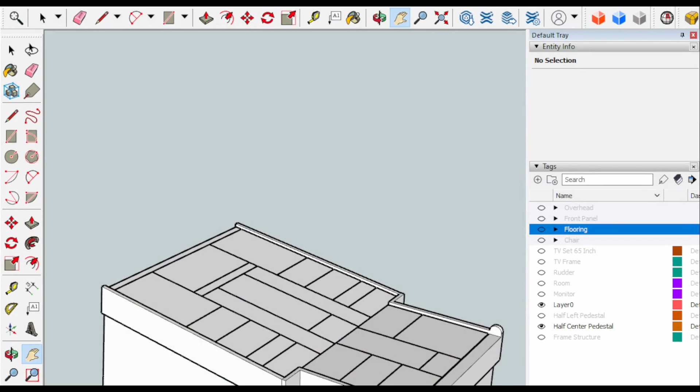Okay, so here we are, the center pedestal design. I'm going to show you this construction made of MDF panels - I think it's 9mm, mostly 9mm, and 12 millimeters thickness. I'm using metric numbers anyway, so it's 9mm or 12 millimeters thickness combinations on the MDF panels. The structural part, I guess, uses 12 millimeters, and the panels mostly use 9 millimeters.

The whole panel is glued together using super glue, so use a mask, a really tight filtering mask, because the fumes of the super glue are toxic when it gets in touch with particles of the MDF. But once it's glued, it's really super strong and glued together well - so even without using a nail or screw in constructing these cabinets, surprisingly it's very strong.

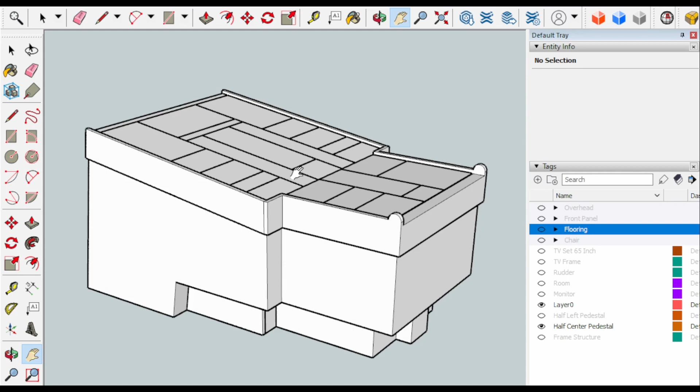Even with the loading of the throttle mechanism, it can hold quite well. This is close to the real one, except this is a bit too wide in terms of dimensions, but the overall dimension is probably okay. It's been adjusted from the reference drawing and photos, so it's mostly okay.

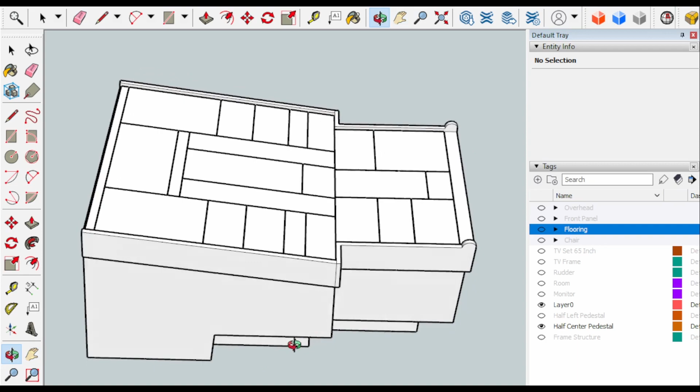These are the panels. The dimensions of the panels will be used in CorelDraw to come up with the right panels, which will be attached to this construction. When constructing with MDF, I try to be as accurate as possible within millimeters, because once the panel is set in, there will be gaps if not properly done - the gaps could be either too big or too tight.

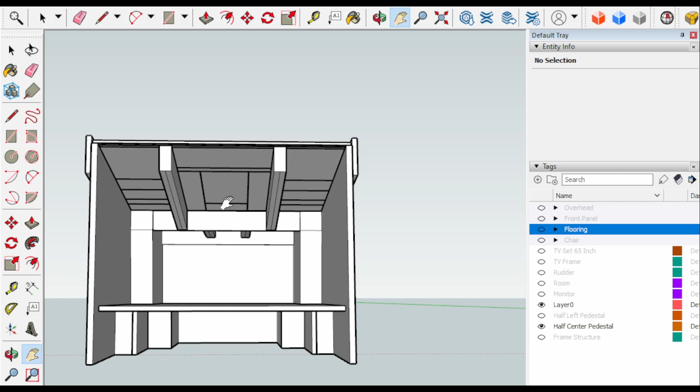So this is the structure. There's a brace MDF panel here for the strut to attach to. This is a double 9mm attached together, so each side has 9mm, or almost 1 centimeter or 10mm, of space to screw the panels from on top. So this is the whole construction.

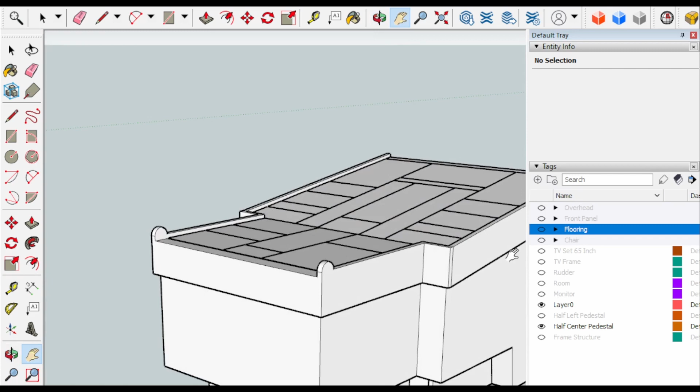Actually, this isn't shown here, but on the bottom area there's a base, and it's actually screwed into the lower deck of the cockpit. The upper cover here, made from MDF, is actually covered by faux leather.

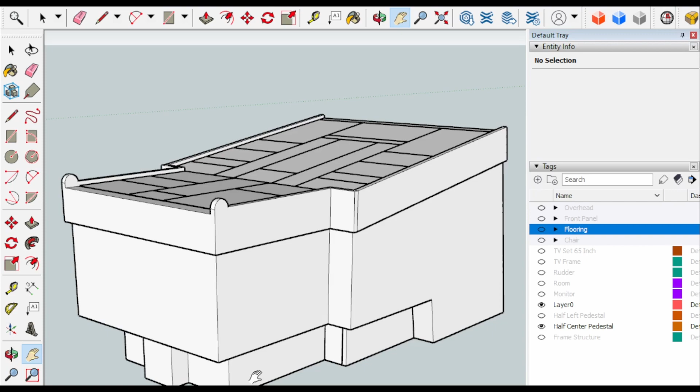The faux leather color is kind of blue, dark blue-gray, so it was very difficult to find. Finally I found one that quite matched the original color of the faux leather, then covered this MDF panel with it, and screwed it from inside using a wood screw so the screw wouldn't show up on the outside. So from the inside panels we screw these edges, this cabin - I mean the pedestal edges here.

Okay, so that is the main construction. Once I'm done with this dimension, I transfer the dimension into CorelDraw.

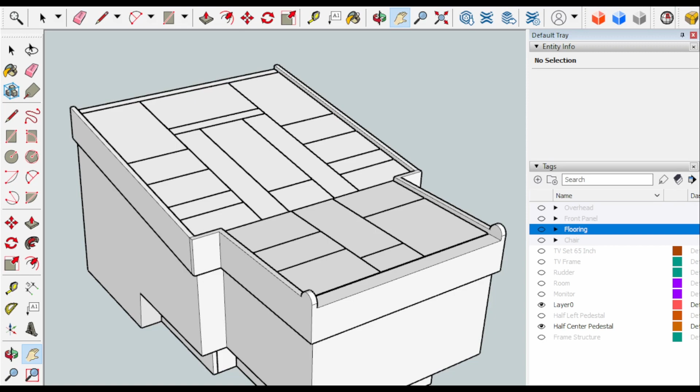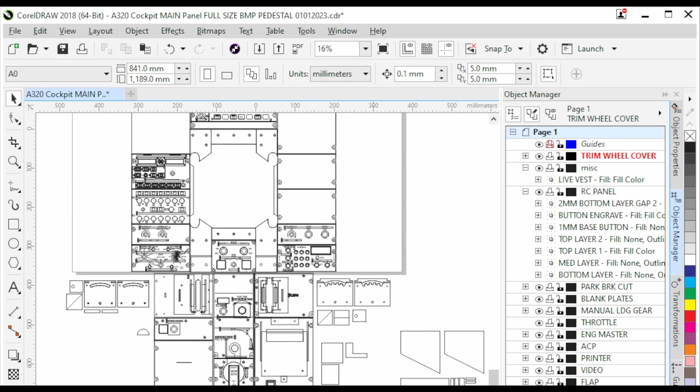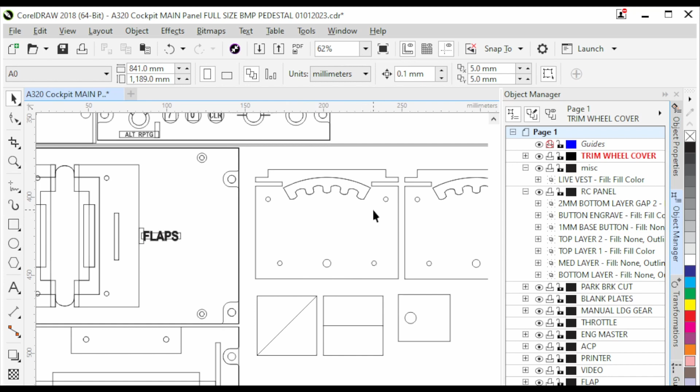This one is for flaps mechanism. So this is the side panels here, where you put a 3D printed shaft with a center shaft connected into a potentiometer here. So it's spring loaded, so you have to pull up and then move to this gated channel here. This one is sandwiched over here and over here to create a gated kind of mechanics for the flaps.

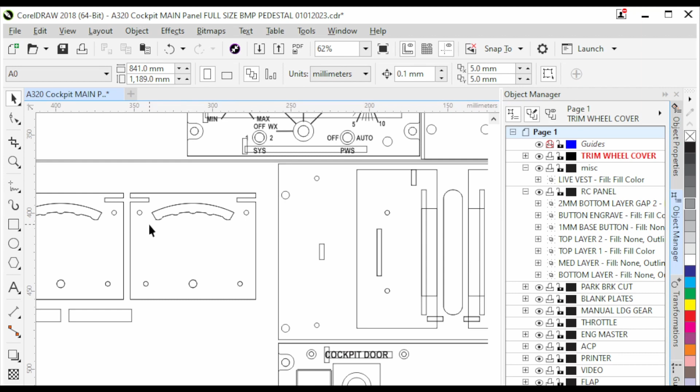On the other side there's a kind of spoiler mechanism. This one is not gated but slightly raised, so you can feel it's not smooth as probably the original. I've been told that it was supposed to be smooth, but I created a kind of gated mechanism so you can feel its tab or its position, this spoiler. But I've heard that actually it's not supposed to be like this.

Also the switch, later on using a push-pull switch - I'm gonna show the mechanics later. It's a car light, an old car light push-pull switch, which I constructed using 3D printing, so I can push and pull the lever when I want to arm or disarm the spoiler.

I didn't simulate the push down to enable the spoiler manual setting. It has to be - the lever has to be pushed down, and then you can move backward on the handle itself. I don't simulate that because initially I didn't know about it, but once I realized that it's supposed to be there, my design was almost complete, so I didn't want to go back and redesign the whole thing again.

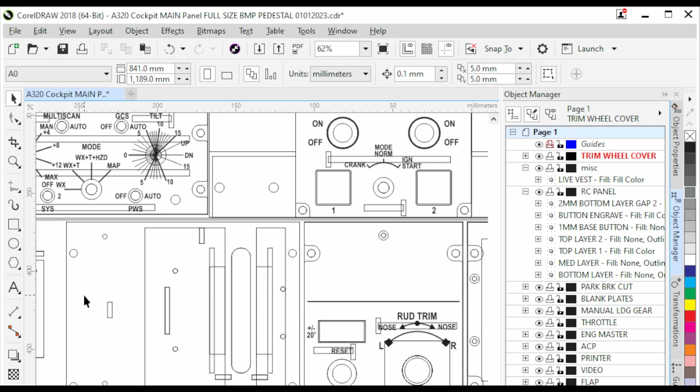Okay, so yeah, basically that is the Coreldraw. So this is a 3-layer or 4-layer panel design. I can start from this simple switching panel for the source of the air data from captain or first officer or normal, mostly in the center position. I connect this into MobiFlight, but since fly-by-wire does not simulate this area, it's not yet activated.

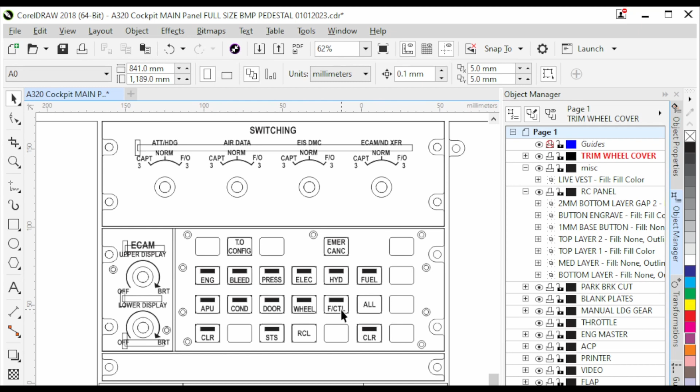This one's very important - I use a lot of Ecam switches where you can change Ecam display. Here it's actually using a hybrid solution. The top panel is actually acrylic. The bottom parts are actually 3D printed to create a kind of housing for this button. So it's a combined housing, it's not separate switches. I'll show you later on in SketchUp.

This one is opening for the throttle tech. I measured the throttle tech once it arrived at my home, and I measured the whole thing, then tried to design and incorporate the opening for the throttle tech throttle. I'm gonna talk about the throttle tech throttle later on.

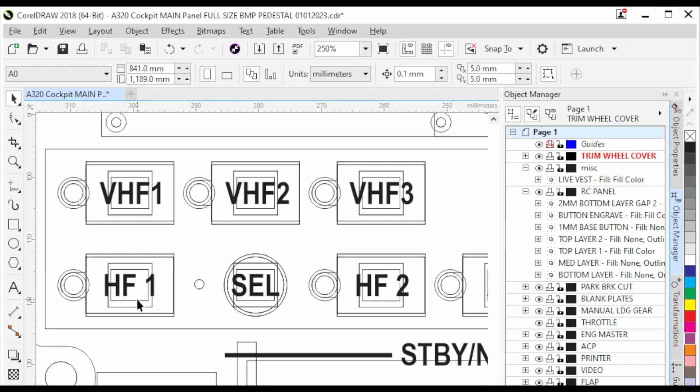This one is for radio panels, mostly acrylics, 4-layer, because there's some raised panel here which needs to be simulated. So this one is 4-layer acrylic. You can see here there's the button larger than the opening, so it's a dual stack acrylic. There's a top acrylic and then the bottom acrylic, which actually sits behind this top panel, so it won't pop out, but it will push down to push the micro switch and interact with it. So it's mostly a temporary switch.

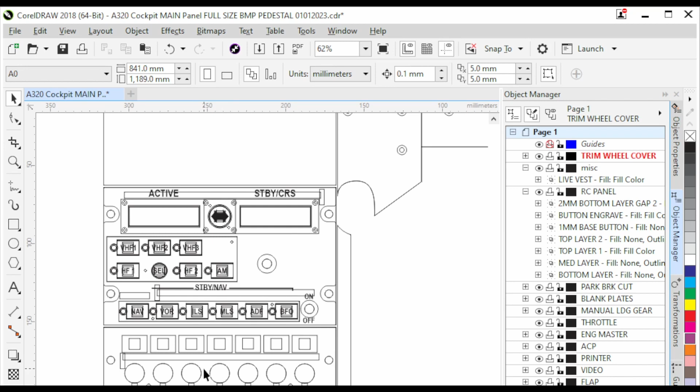Yeah, so this is the whole design. You can compare later to my pictures or drawings on how the end result looks, but imagine this from the Coreldraw. The audio panel, I didn't use it. The ACP is not used because I don't simulate the audio switching yet, and the fly-by-wire, I think, is not set - it doesn't enable these panels to work properly as in the actual aircraft.

This one is the dimmer panel using a potentiometer, which is connected into a real dimmer, so it can dim the flood panel in the main instrument panel in front, and the whole integrated backlight can be adjusted here using the dimmer.

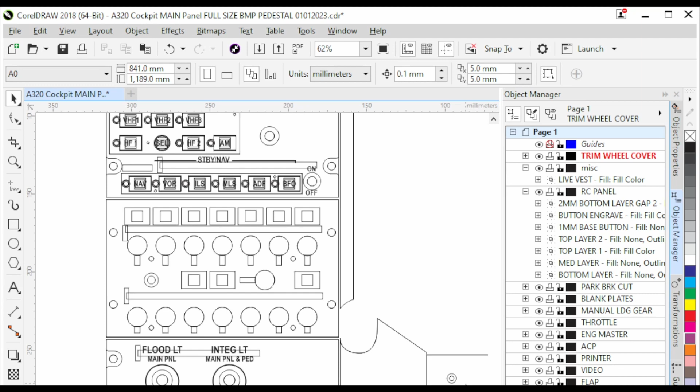So I'm using a powerful high voltage dimmer to control the whole backlight of the whole panel, from the main instrument panel, pedestal, and other side panel. Except for overhead, that has its own dimmer.

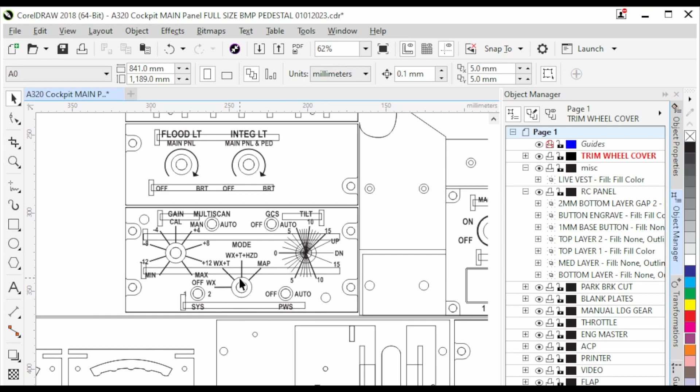Okay, the radar is connected to MobiFlight, but only a few functions work, like the on-off position of the radar. Auto here, I think this one also works, if I'm not mistaken. But anyway, fly-by-wire did not yet have a fully functional radar panel with switches working.

So this is the engine master switch. I'm not using the throttle tech given from the product itself, so I scrapped it and stored it. I'm using my own design with gated switches, so it really feels like the real one. So it's a gated toggle switch. I'll show you later on the switches.

And this one is also using the gated toggle switch. This one is the LED display for the fault, or fire annunciator. This one is the mode switch itself, the crank, ignition, start. This is a very important switch, so I'm using my own knobs here.

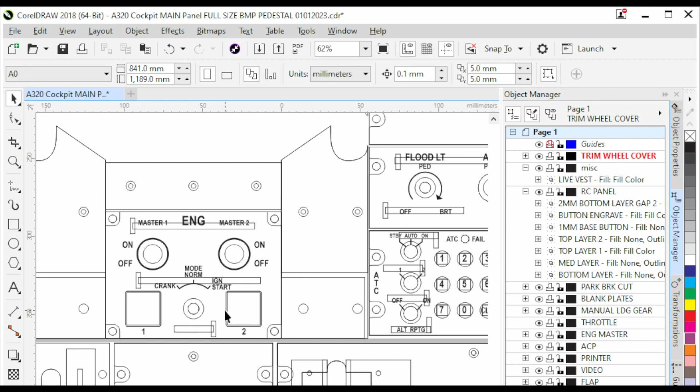This is a simple dimmer also. This one is quite difficult because you have to arrange the keypad and also a big LED here, 7 segment, 4-digit. I plan to use yellow or green to simulate the real look, but I couldn't find the real size. The next size was actually too small, but this one was too big, so I picked the bigger one. Yeah, this is a 4-digit big 7 segment.

And the problem with this is not only constructing this panel and the PCB itself, because it has to have a certain height. So I'm using micro switch or tactile micro switch from AliExpress with backlit color, which has a certain height. You have to measure your own switches first, and then redesign the whole thing, the thickness of the panels, so the round caps protrude enough that they're not too far out, but not too recessed that it's difficult to press.

So that is the difficulty in constructing it. Also, it's quite difficult to program because this ATC panel requires certain programming. Fortunately, in the MobiFlight library it's been prepared, but you have to copy it, test it, and it's quite complex. I made trial and error several times, which took a few days to really understand how it works.

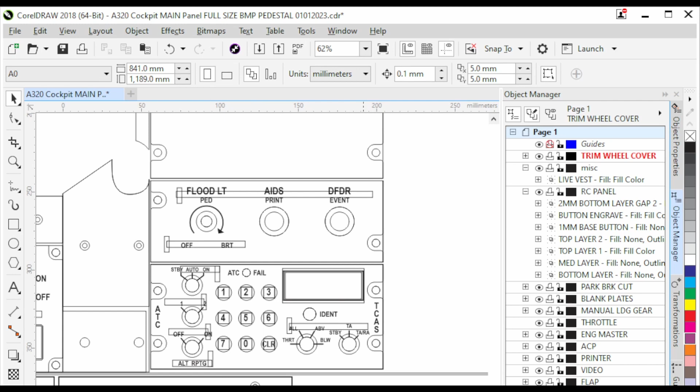And I'm not a programmer myself, but I know logic. I can imagine if people don't have any programming experience, it's quite challenging to program this. There isn't a ready-made module in MobiFlight that you can use immediately, so this one is not only challenging in construction but also in programming.

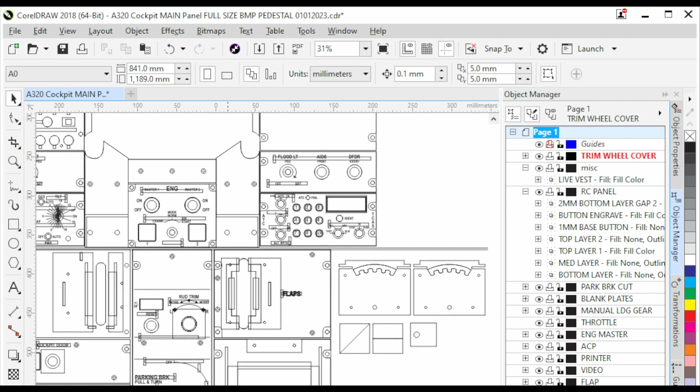The rest is, I think, the rudder trim. Oh, the parking brake, I made myself using a resin 3D printer, so it looks like the original. And the mechanics of this parking brake, where is it? I forgot, it's actually not here. I'm using the old parking brake mechanics, I forgot where. Anyway, I had to create my own construction.

Using a 3D printed filament shaft, which is pretty strong, combined with some metal shaft and other parts, this one is probably difficult. I need to probably address this alone just to discuss the parking brake, the flaps, and the spoiler. But unfortunately it's already installed in the pedestal, so I'm kind of too lazy to tear it down again just for the sake of making a video.

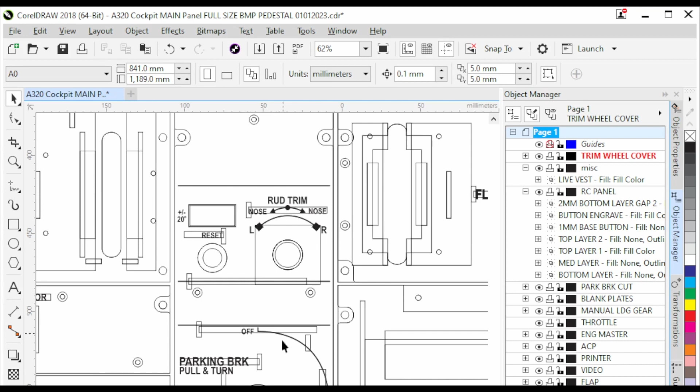I'm sorry about that, but I wish I could explain it during the creation of this parking brake, spoiler, and flaps, but it's quite complex in my opinion for some of you probably. The files, the 3D design, has been uploaded to my Google Drive, so you can find it there and try to imagine yourself how it works. Feel free to ask questions later via direct messaging if you want.

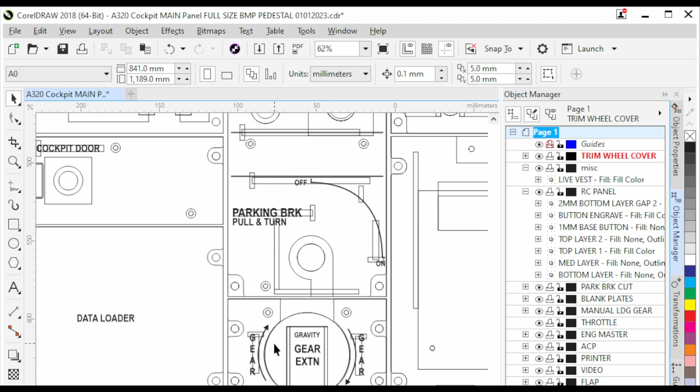This one is not working, just a fake part. This one is working actually—inside there's a thermal printer, 80mm wide, that can be pushed by this, which slews the paper. So you're ejecting the paper, it rolls out, and then you can tear it off.

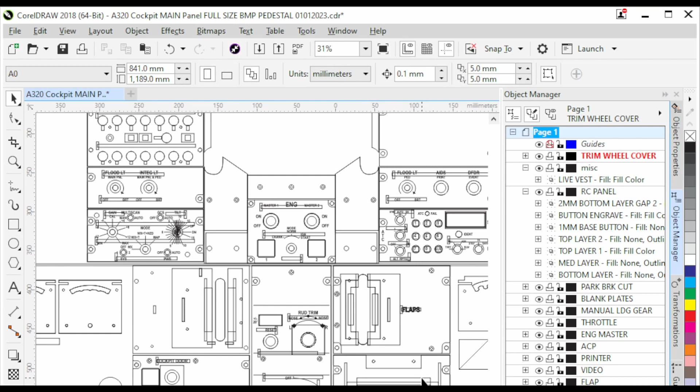So I can open it also to maintain this or replace the thermal paper. This one is working, this one is just a fake panel, and this one is the cover-up panel, because this is for my ECAM, the pilot side ECAM. This one is blank, so I didn't actually buy a second ECAM module.

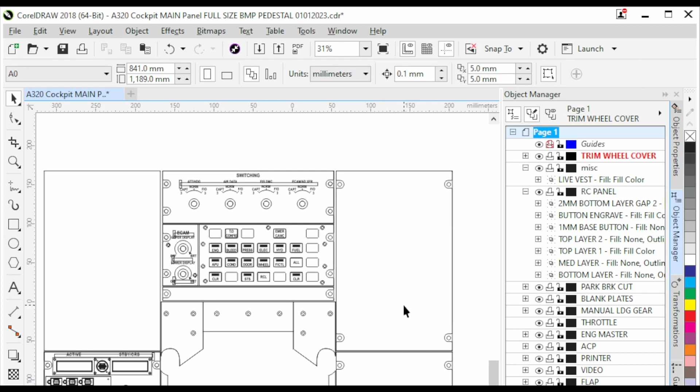So this is the design for the pedestal in CorelDraw. Everything is here and uploaded to Google Drive, and any layer of each of the panels, top layer, bottom layer. If I have more layers, I also put names in it, so you can cut it with some millimeter information there, 1mm base button, kind of those things. You can try to understand the cutout, and then if you want to modify, feel free about it. Okay, so that is CorelDraw.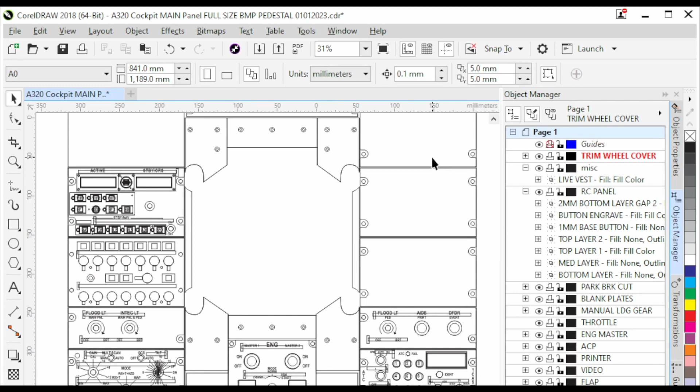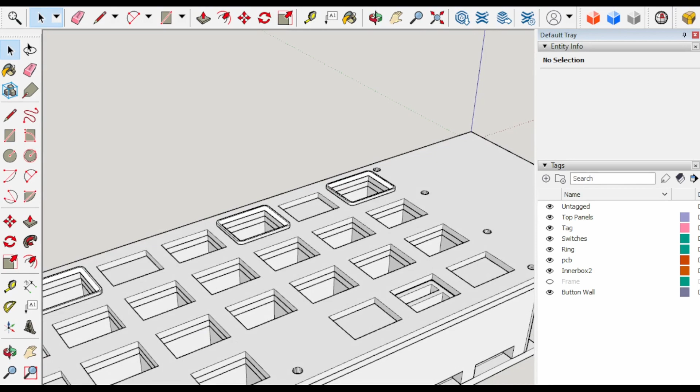I would like to go showing you this one. This is the ECAM 3D panel. So basically, this is the multi-layer panel. The top layer is acrylic, I think the second layer is still acrylic, and the third one is actually 3D printed.

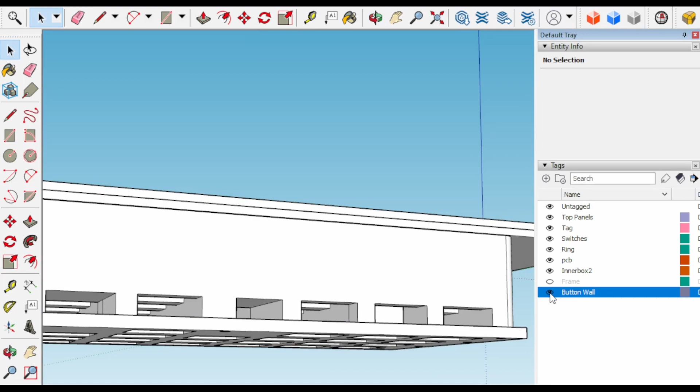So the switches sit here. If I get rid of the button wall, you can see I created a wall using 3D printing here. If you want to see, this is the button wall, basically a hole for the switches.

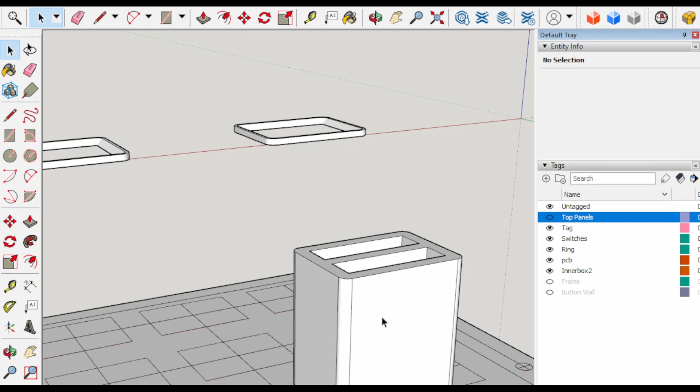This is the button itself. It's a dual chamber button, so you can light up one of two parts. One is for the status that the switch is being pushed or at this position, and the other is to light up the name of the switch. Below it there's a micro switch attached to this button or knob, and it's then covered with acrylic, which I engrave with the name.

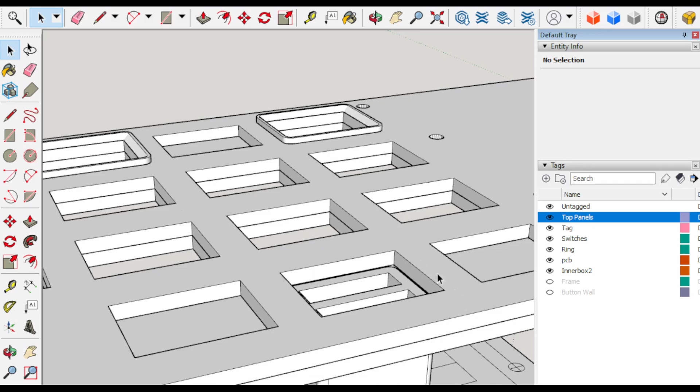If you see here, where's the inner or the button wall? It's basically something like this, housing the knobs. You see these knobs, they move up and down. This is quite difficult to create, because if you're not accurate in making this button box, there's friction happening between the button and the housing, and that doesn't feel good.

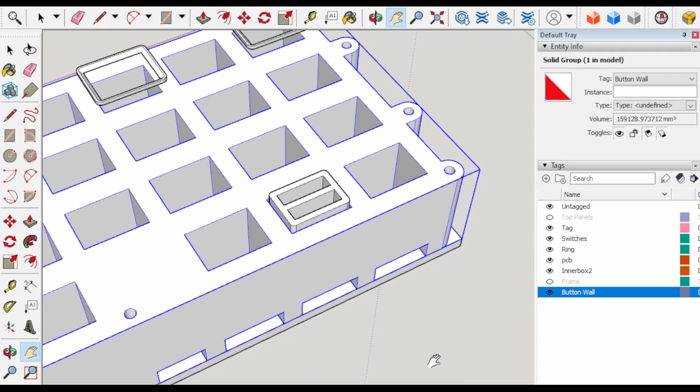So I need to grind and smoothen the inner parts of this button box housing, and the button itself. So yeah, this is quite complex. The files have been uploaded here too.

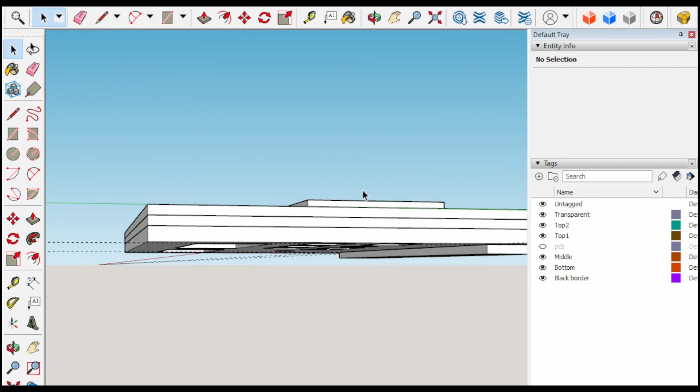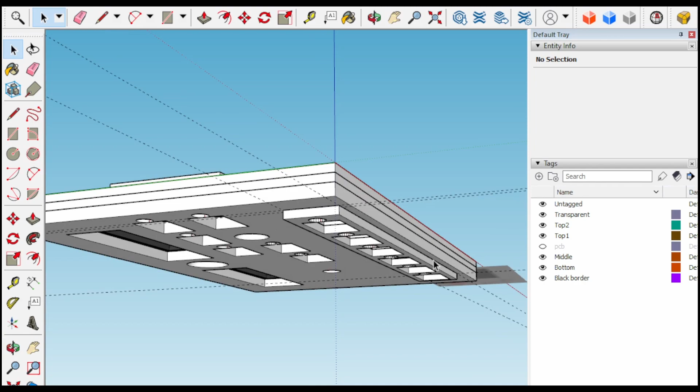The other one I'd like to show you is the radio 3D panel. This is similarly constructed, but different, using acrylic only, not 3D printed, but multi-layer - almost like 1, 2, 3, 4, and 5, actually 5 layers of acrylic. The top one is 1 millimeter, this one is 2 millimeters. The bottom part is 3 millimeters, and there's also a switch stand to put the PCB of the switch, which is a bit recessed, so I need to add another 2 millimeter cutout.

This one is transparent, the rest is painted. For the cover, I sandwiched this transparent cover between two 2 millimeter acrylics. So basically that's how I created the radio panels.

The button itself is cut out of acrylic, and the LED is connected into the MobiFlight, of course, to light up a certain channel or VHF 1, 2, 3, and HF. That will light up this LCD.

This one is for the dual stack rotary encoder - a dual gang rotary encoder, inner and outside, so I can use the big button to rotate and change frequency, higher or lower, before pressing this one to move from standby to active. Okay, so that is the radio panels.

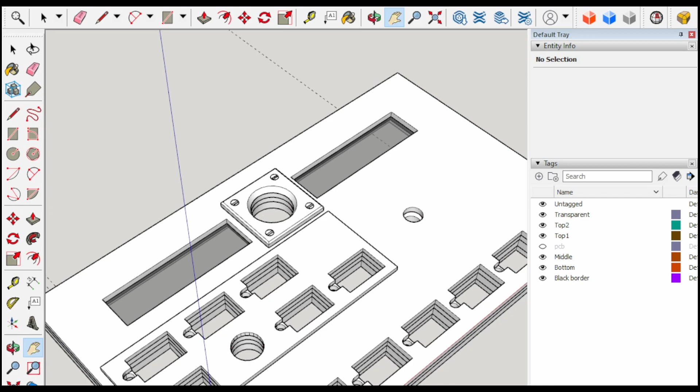What else? I think mostly that is the design. I'm going to show you several parts. This is the switch I'm using for the master engine switch. You can see it's a gated one here - there's a gate, so you have to pull up and then move forward or rear.

I can open this top cover here, unscrew it, and expose the thread. You can create the thread using a 3D printer for the knobs of the master engine switch, and then thread it to the switch shaft. Then you replace this round knob with your special resin-printed engine master switch from the A320. This is a big size switch, not the micro switch or the smaller switch. I think I bought it on AliExpress.

It's Sierra 2 Alpha London - that's the code name of the switch. I think the manufacturer is NKK, so it's a Japanese NKK toggle switch. Basically it's a 2-position switch.

So it's on-on, basically no off position, because you cannot put it in the middle - either it's connected here or, sorry, I can't show you well, but the center pin connects either to the left or to the right side depending on the position. That's good for logic controllers, because you don't have to create a logic gate or whatever to change the condition. That's the switch.

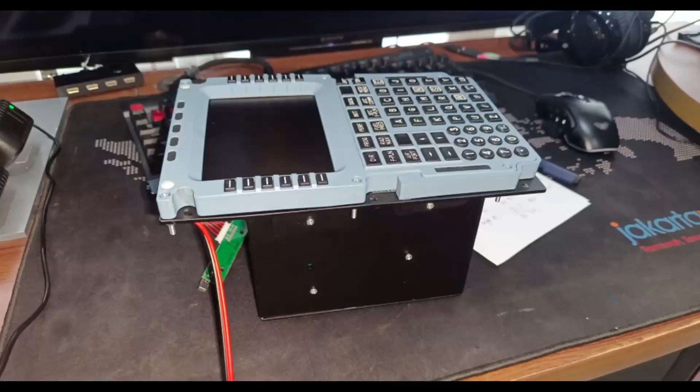This one is to show you the modified MCDU. So if you can see, the initial MCDU from Java Simulator is very shallow in depth in terms of the controller. I put a lot of boxes below just to house the Arduino and some shift registers to capture the whole key here using cable actually.

So it's quite tedious work to cable all these buttons into the Arduino and the shift registers to read all these switches, but at least it's mine, so I can control it directly from MobiFlight as I wish. So now it's working well, integrated with MobiFlight. I no longer have to depend on Java Simulator's middle software anymore.

So I'm just using the case and the buttons, and the rest, the inner components, are actually mine, using a micro switch.

Yeah, so that is the pedestal, guys. So I hope that gave you a bit of insight into how I create the pedestals. We're gonna move into part 7 when we talk about the left side panels, or left side pedestal, which houses the joystick and also the tiller. It's much simpler, but I'm going to show several parts on that side wall pedestal. Anyway, so see you on part 7.